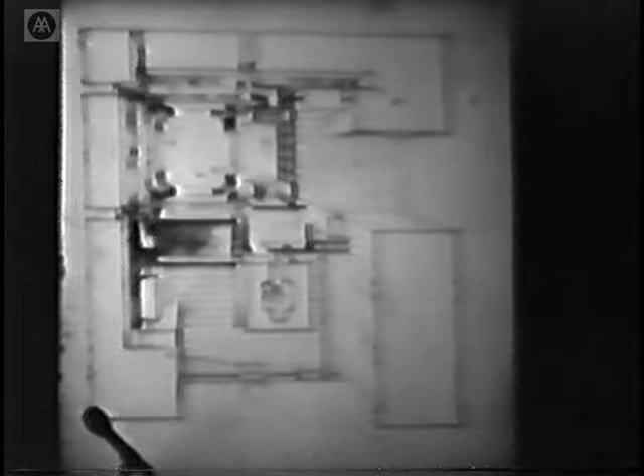The drawing on the left, which looks as though it's come out of the archive, covered in patina as it is, is the first job we did, which is Forest Gate High School. And that on the right is a recent building, Melrose Avenue Activity Centre. The one on the left is a masonry building, the one on the right is a steel frame building with cladding, which we will talk about more later.

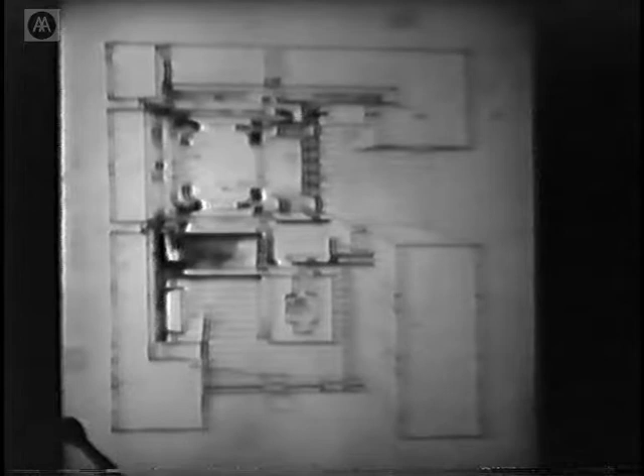But in both, there is a similar preoccupation, albeit the one on the left is to do with the coincidence between structure and the spaces, and the one on the right, being a frame building, allows a certain amount of loose fit in terms of the functions, but both address themselves to this business of hierarchy and priority.

In Forest Gate, for example, the context of the building is established by the classrooms, which is this L-shaped container, and which encompass and grip the communal parts of the building, which is the hall and the library, stage, and small hall. That is hall, stage, small hall, and library over it. And then these, in turn, inflect the spaces which are contained by the whole figure.

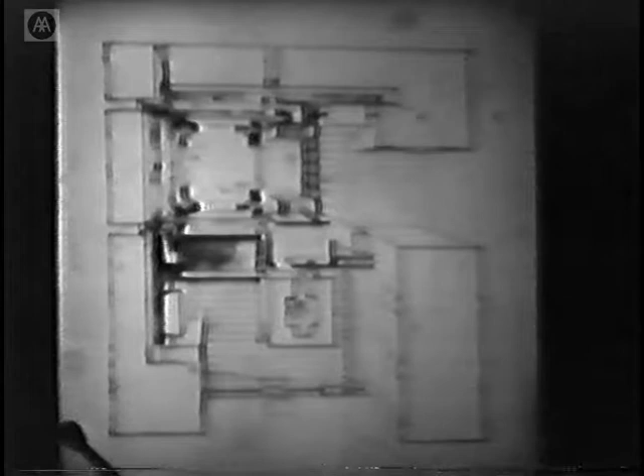In the case of this much smaller building on the right, this activity centre, the lower space is the communal hall for this activity centre, which is a euphemism, I think, for a village hall, really. But one of these dreadful modern expressions which one has to deal with these days. And the peripheral L, as it were, are the special kind of private functions which support the space. And without their existence, in both cases, there would be no container for the hall. It exists as a dependent upon its container.

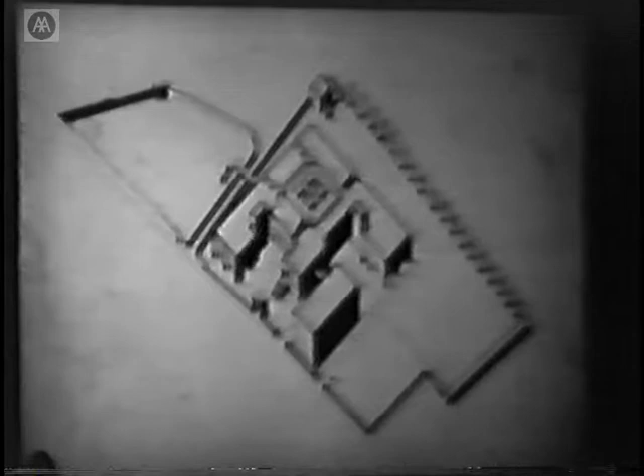And similarly, if one goes on to later jobs - this again is Forest Gate, and the one on the right is Holloway College, chemistry building. The building on the right, the chemistry building, makes the principal laboratory spaces on the ground floor by the matrix of the stuff over it.

These big roof lights actually are related to large teaching spaces underneath. And if you were to lift off the top floor, there would be precious little to contain the volume of these large labs. So that one idea is contingent upon the other.

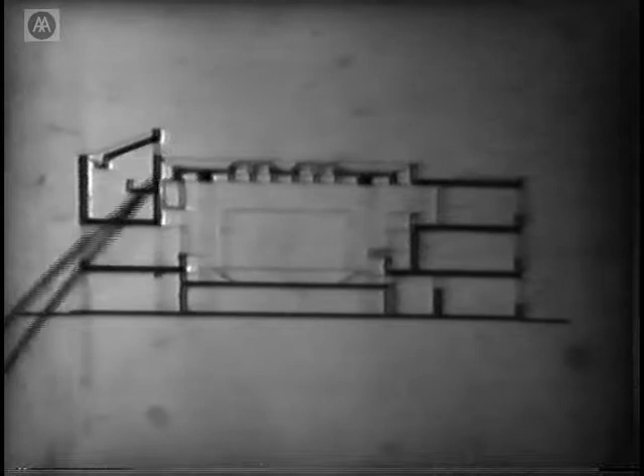This on the left is our first job again, Forest Gate High School, and that on the right is a later school, Clifton Cannon Lee in Yorkshire. The one on the left, again, exhibits this thing I was proposing just now. That is to say, here's the library, the small hall, the hall, and the classrooms. You can see that if you strip it off, there's no container for it, so that the one is dependent upon the other.

And much can be said of the other building on the right. In both these two cases, and also in the case of the activity centre, this coincides with what can be considered private functions, that is to say the classroom areas and ancillaries, and public functions, those which are communal and are in some way symbolic of the essence of the school or schools.

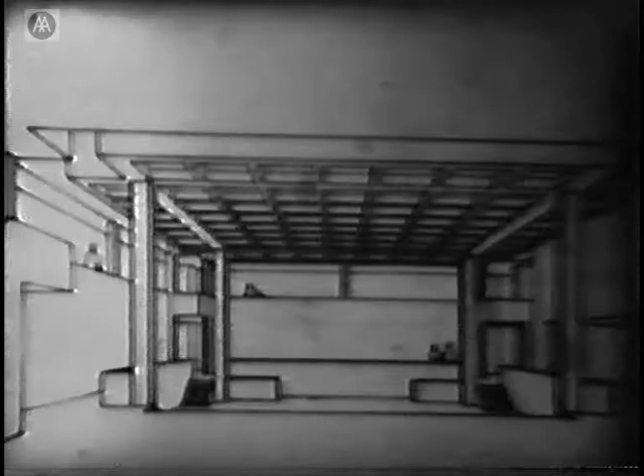This is illustrations of, on the left, Forest Gate, and on the right, the chemistry labs. And with the slide on the right, you can see that the grey area above, that is to say these strips of material here, actually form the container for these semi-public, big generalized laboratories, which are the teaching laboratories below.

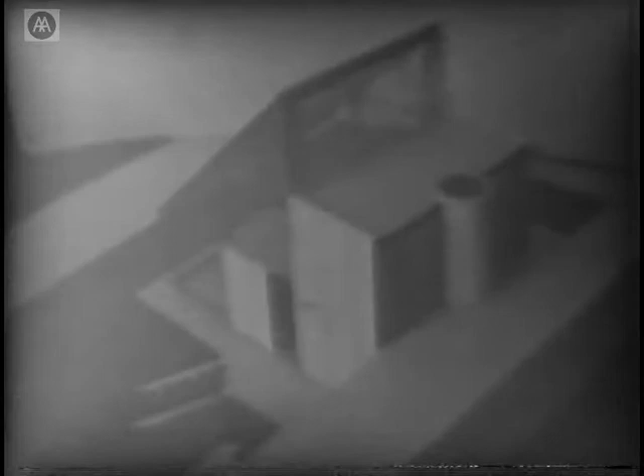Now that, I think, concludes the introduction. But just to say one thing, even it's nice. Oh, that's it. Yes. I was going to say one more thing.

Even when you're dealing with a small problem like a house, similar preoccupations can be enjoyed, and in the little house on the right, the same preoccupation exists. That is to say that here, in this area in front, as it were, in the glazed area, exists the living rooms and so on, the more public part of the house, and the rear part, both the top level and the lower level, one gets the private functions, bedrooms and so on, and the two elements thereby are locked together. This is a different idea than a string of beads.

In the case of the labs, which Alan will now expand upon, this principle of volumetric planning, as it were, has an advantage insofar as it permits a large-scale module of pieces. That is to say, you get a series of T's here, and associated smaller laboratories to the sides, which are a trigger, as it were, for any possible extension, which at the time we designed and built this building, we assumed might happen.

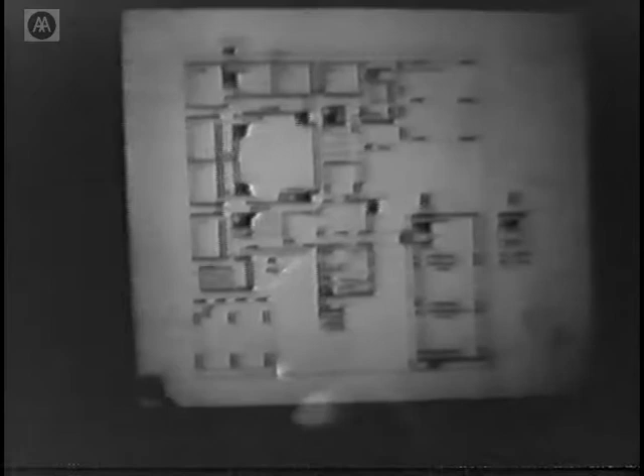Well, this is going back again to Forest Gate High School, which was our first job. It's in what used to be West Ham and is now Newham, a straightforward secondary modern school for girls and boys.

I think there's a site plan which perhaps I ought to show.

The site plan was really indicated on the axonometrics that John showed just now. It's a very small site, and one of its characteristics was that it was intersected by a public footpath which had to be left intact. So the site consisted of two sites, one large and one small, and the small one was a strange triangular shape, on the left of the plan you see. Because of the restricted site, we decided to build as high as possible, compatible with convenient use of the school.

And this we thought would result in a three-story building.

Owing to this public footpath that bisects the site, one of the essential ingredients of the brief was that we should be able to move easily from one side of the site to the other. Furthermore, in the future there would be a further extension, which we were going to locate on the smaller side of the site, which was another reason why we would have to bridge over this public footpath.

This was, I suppose, the primary practical reason why we decided to have the main circulation of the school on the first floor. There were also formal reasons for doing this, because in so doing, one was able to create a principal floor which was equidistant from the other two floors, and so somewhat reduce the feeling of the three-story building.

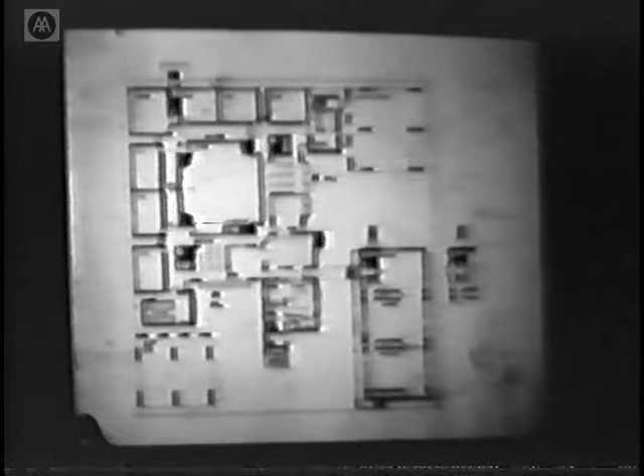This is the ground floor. The plan on the left is the ground floor, and as John explained before, the classrooms wrap around on the outside, and the central space is the assembly room with its adjacent small hall and stage.

Well, basically those are on the first floor, and the ground floor consists of a large store which is about 6'5", 6'6" high, in the centre under the assembly hall. Under the stage and the small hall, which are slightly raised from the assembly hall, we have the main entrances with their locker rooms and coat hangers, that kind of thing.

This is where the students actually enter the building, in these positions underneath the stage and the small hall.

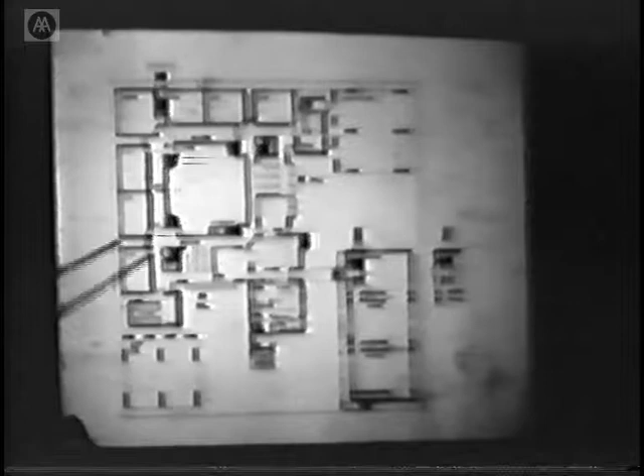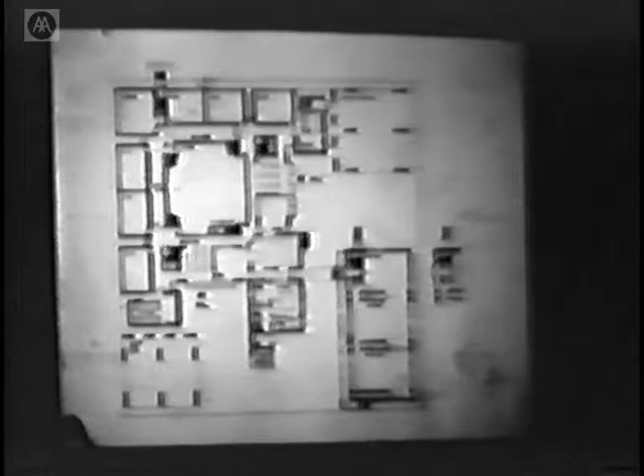There is a truncated L of classrooms on the ground floor, and the extreme ends consist of covered play spaces, which are under special classrooms on the first and second floor, the art rooms and science rooms, classrooms which are bigger than the other ones and which require special servicing, and therefore should be grouped together.

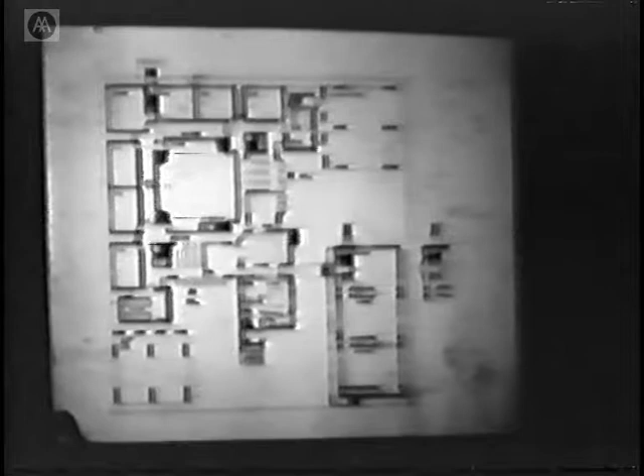There's a kind of binuclear organization in this school, which a lot of things seem to fit into. There is a division. The entrances are divided between the girls and boys, which is completely a non-ideological decision on our part. It was simply useful as a further extension of this binuclear idea, and it was in fact a requirement that the headmaster at that time wanted. But of course there's no reason why it should be maintained in the least.

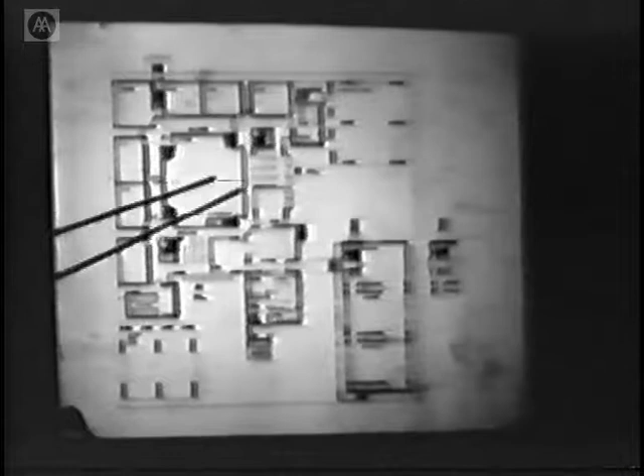In addition, on this floor, besides the entrances, you get a dining room here, which is associated with the kitchen there. And then also there are lavatories, which are entered straight off the hard play areas at the ends there and there. And the two main staircases go from the ground floor to the first floor in those corners.

Now this is the principal floor, the first floor, and I'm sorry, I'll probably be obscuring it from people on the right.

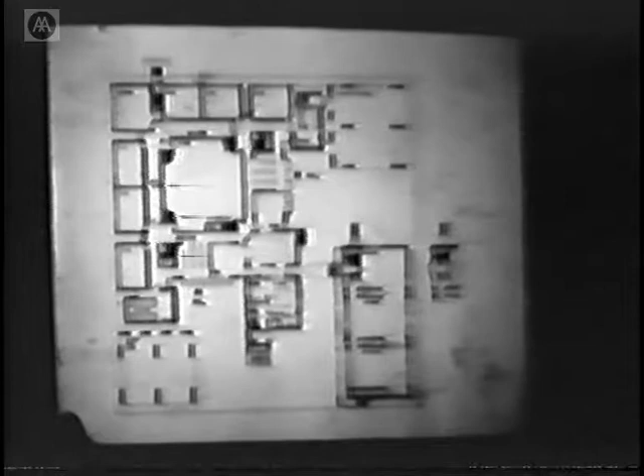These are the special classrooms at the ends, which are over the covered play spaces. This is the assembly hall.

The point about this first floor circulation is that because it's the first floor, it becomes the most frequently used level of circulation. In order to circulate from one end of the building to the other, if you're going from one classroom to another, you actually have to pass through the hall. You pass through it not through the center, but along a raised gallery at first floor level, about 3 or 4 feet higher than the assembly hall itself, and you can circulate right round the assembly hall.

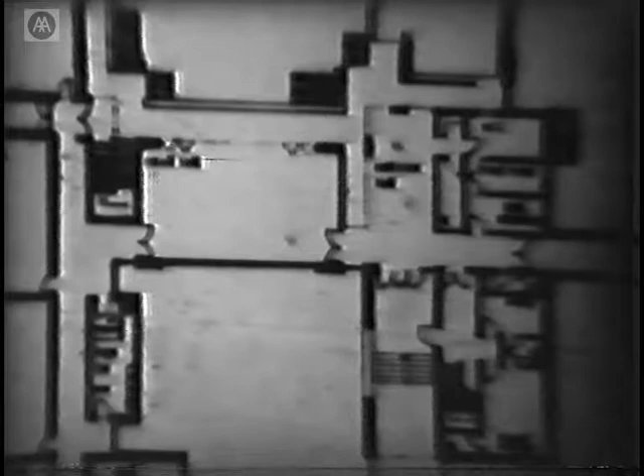This has an added advantage which was made use of by the English master there, who looked after dramatic performances in the school, in that it could be used as a theatre in the round. It could be used either as a conventional theatre with the stage here and the audience in the assembly hall and more audience sitting round, or the whole thing could be reversed, with the audience on the stage and the hall used for acting. The lights were organized so they could be moved easily and adjusted to the required positions. This actually worked quite well—we saw a performance of theatre in the round, which was quite successful.

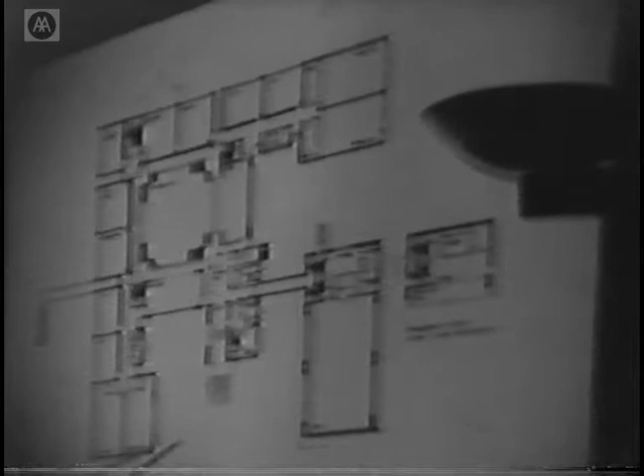This corner, over the dining room and the kitchen, is the main entrance to the school, to which you approach from the outside. There's a flight of steps leading up to the first floor. The entrance to the side, not shown on this drawing, is the actual side boundary along there, and there's a gate and a sort of porch which you go through. You arrive almost in the center of the school, and you immediately see the space of the hall.

Here's the bridge which leads to the other side of the site. The footpath runs underneath and was intended to lead to the extension, which would have been a separate pavilion on two stories. There's a further bridge which leads to the gymnasium, two gymnasiums at this corner of the building. In fact, the accommodation in this block consists of workshops on the ground floor, and two gymnasia, one over the other, one for girls and one for boys.

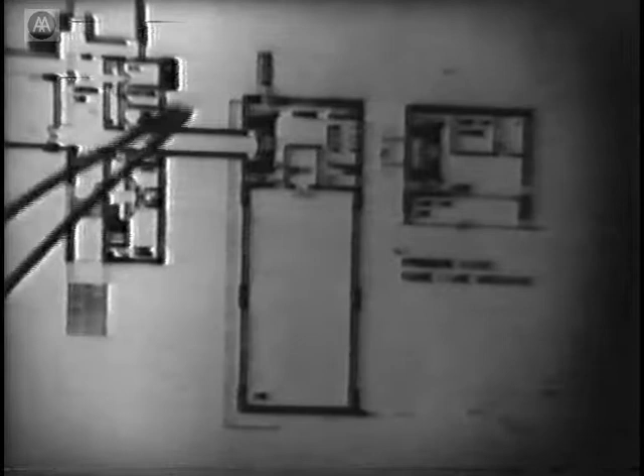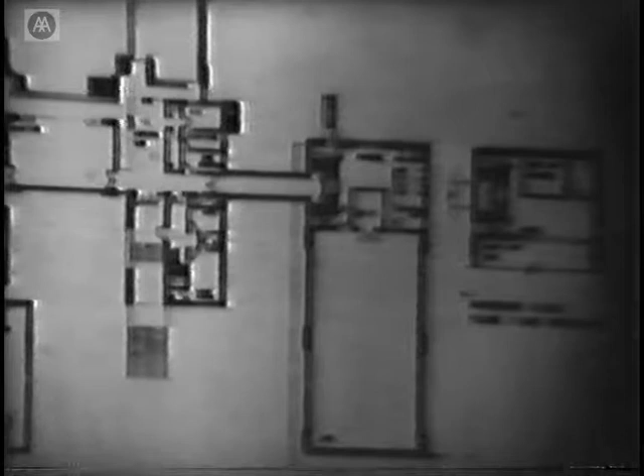This enabled one to get the noisy areas isolated from the school, but also enabled us to complete this notional volume which the building, in theory, consisted of, providing the feeling that in these areas you were actually inside the building with no roof. So the environment of the building really starts along these lines, and this is emphasized by the treatment of the surface of these courtyards, which were in red tiles, similar in colour to the red brick of the building.

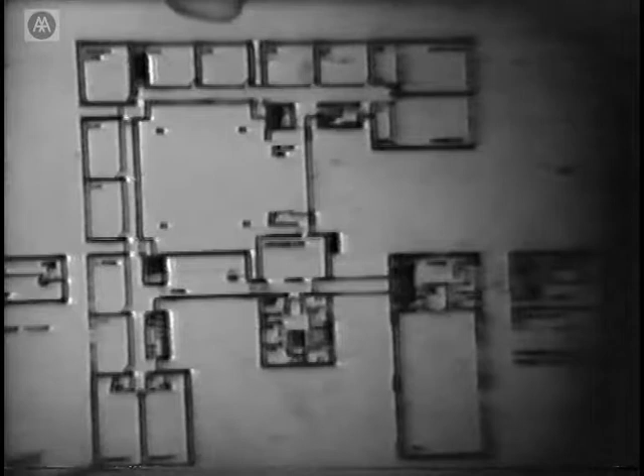This is the building, in fact, as it was built, and it was capable of extension either sideways or at the bottom or at the top. This drawing shows an extension at the top, and I think there's another drawing which shows the potential extension at the side.

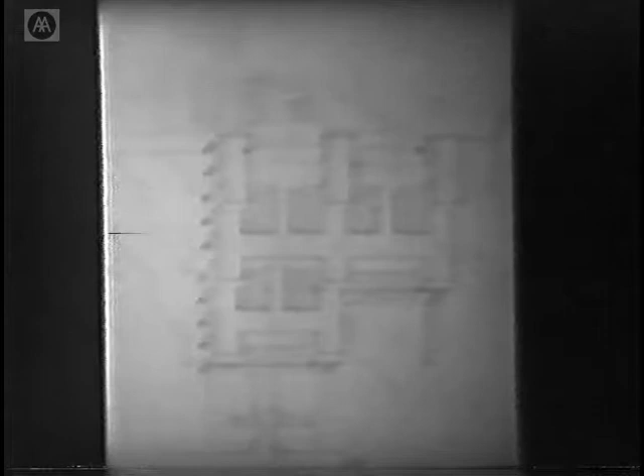Just to reiterate what John said about the basic formal concepts, these light wells let light into the major undergraduate laboratories, which extend. Could we go back to the one just before? This is the building as it is, in fact, and I'm sure it'll never be any different, because things don't happen the way you expect them to.

The undergraduate laboratories occur at the ground level underneath these light wells, and they're organized from side to side. You can see out at the ends, but the ends don't in fact provide much light — the light is provided by these light wells. But on top of the undergraduate laboratories, there is a kind of network of other provisions of a slimmer, skinnier kind.

The first type is this T of postgraduate laboratories. There were, I think, six of these — we had provided six. 1, 2, 3, 4, 5, 6. And at the ends of the arms of these T's were double-banked strips of professors' laboratories and offices and various ancillary rooms.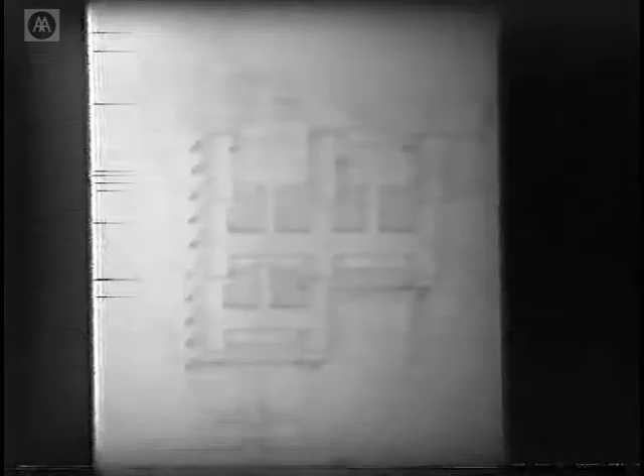Would you like to go on? Yes. If you move, I think we should keep them on. Go on. Okay, so, describing the plan.

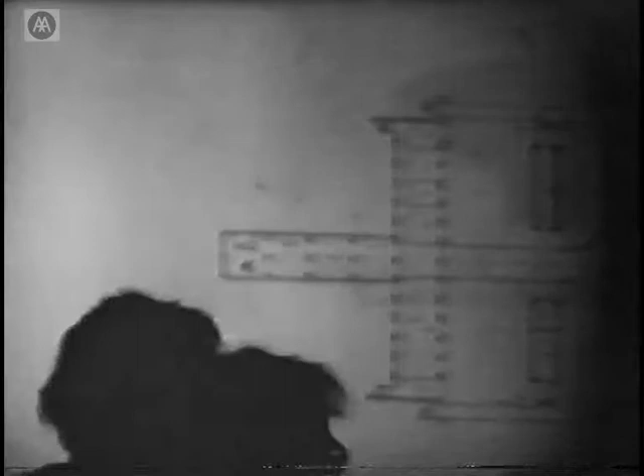The lowest level of plan is the service entrance here, the store here. Two sort of dangerous laboratories liable to explosion had to be outside the building there, and the workshops along there. Then going up one floor, this is the lower of the two pairs of undergraduate laboratories with their ancillary rooms along the right-hand side, and a vertical circulation core which goes up through four stories and links the main service storage with the various laboratories.

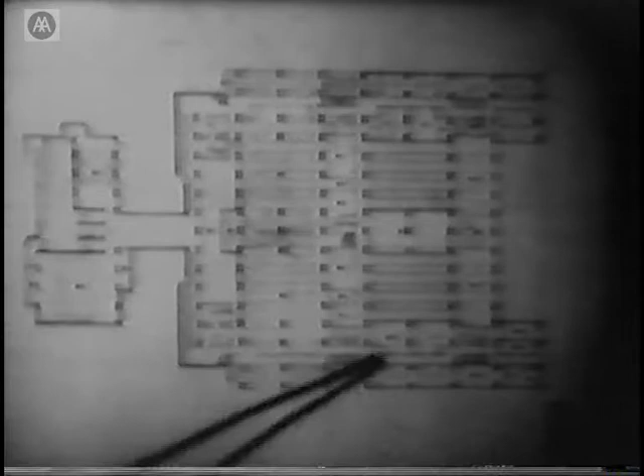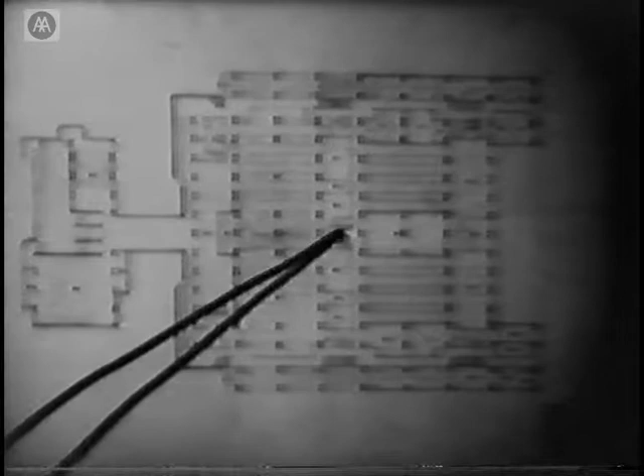Well, anyhow, this is the next floor. You see, really, the building is divided into two parts — that part and that part — and this part is an exact repeat of the part below. So here again you get the two undergraduate laboratories with their ancillary buildings, and in this case the link to the central core of services is at that point. These are the postgraduate laboratories, research laboratories, and these are the ancillary rooms attached to them.

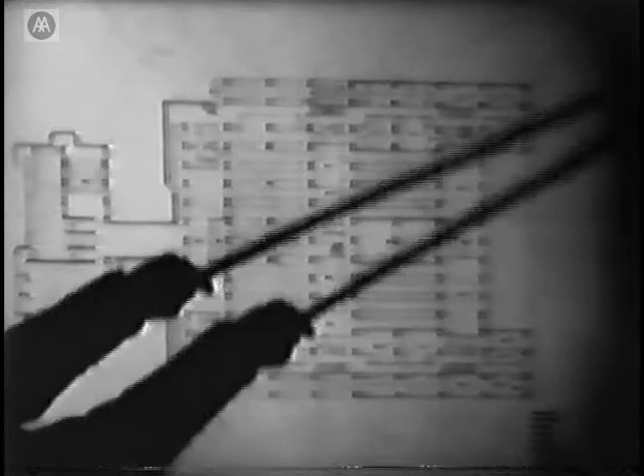Now, going up one further floor, you arrive at ground level, at the entrance end of the building, and this is connected to a pedestrian mall. Basically, the site is organized on a Radburn principle, with pedestrian circulation down the middle and a peripheral road for private cars and service vehicles. This mall, in fact, bisects the whole site and bifurcates at a certain point, linking all the principal buildings on the site. So it constitutes the main entrance to this building.

This, in fact, is the main entrance hall. You go up and down half a floor by means of a ramp to either of the two available floors at that level - if you go half up, you get to a research level, and if you go half down, you get to an undergraduate level. At this level here, you can see there's a connection underneath.

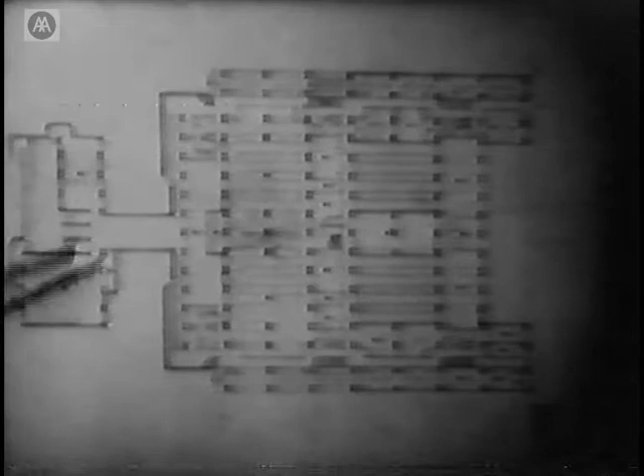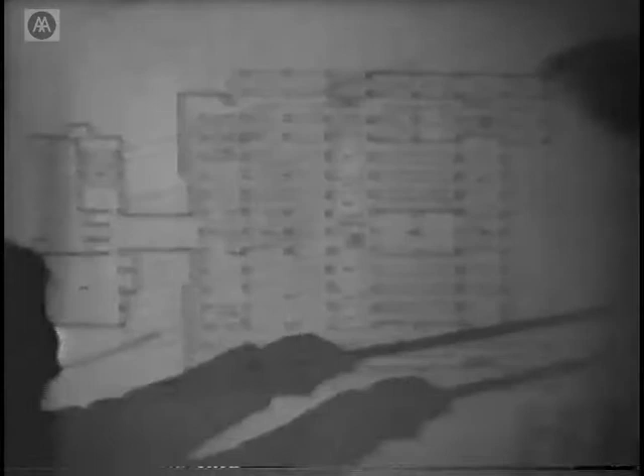I think one more floor, is it? This side.

Well, the top floor is missing, but it consists of rather special accommodation, principally a library, which is detached from the main structural system of the rest of the school, and forms a kind of porte cochere under which you enter. It also dominates the entrance side, as you see from here - that's the mall running along there. The library doesn't announce its function in a clear way. All it's saying is that it's an important part of the building which is not organically connected to the rest, which is somewhat separate.

Then these two wings were the two wings that ultimately were to have extended up the hill. This is the side view - we're showing this model because it's very diagrammatic and illustrates the themes rather better than the building itself. This shows how the building slopes down the site. The circulation of the building runs down the two sides and follows the slope in the site on two levels, like that.

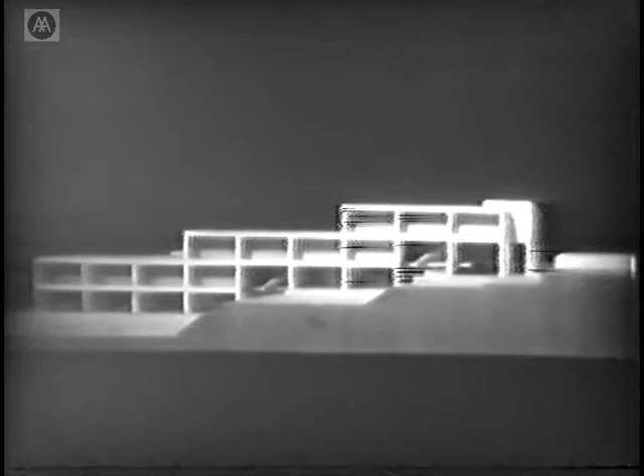You can see that you can change your departments, as it were, by simply walking on the same level. Another advantage of the slope was that it enabled one to get a feeling of the outside more frequently. All of these rooms face over the countryside there, so there's a considerable amount of penetration of outside space into the building.

Connected with that, another thing we did was create a covered gallery on both sides of the building, partly because some students come from Egham, down the hill, and would enter the building from the bottom and not the top. Also, there are direct entrances and escape exits up the side of the building on both sides, and all these routes are connected to this covered walkway which goes up the building. This also enables the building to relate more satisfactorily with the ground outside, because you get a kind of intermediate zone between the outside space and the inside space, which is the covered zone of the gallery.

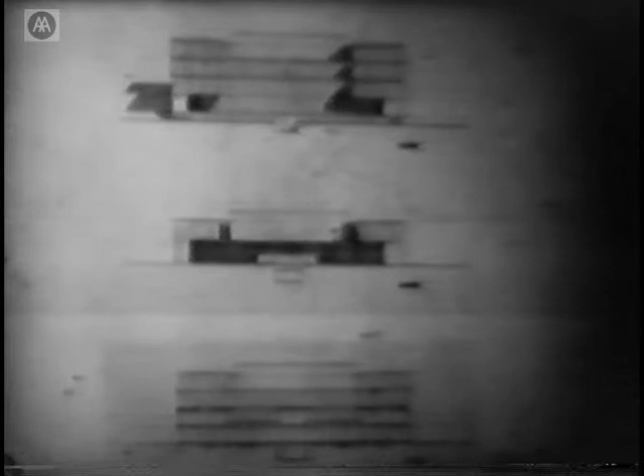Now, about the specific requirements of this particular building, as opposed to general solution types. The first was that it's a very heavily serviced building, so one had to make a decision about how the servicing distribution related to the structure. There were two basic choices: one either made a service level, in which case the services would be more or less detached from the structure, but this turned out to be very wasteful in terms of volume.

So we decided to canalize the services, and this involved splitting the structure both vertically and horizontally. All the services - the piped services, that's compressed air, water, oxygen and so on - were distributed through the split structure, as well as the warm air heating. So the characteristic form of the building is determined partly by this requirement for integration of services and structure.

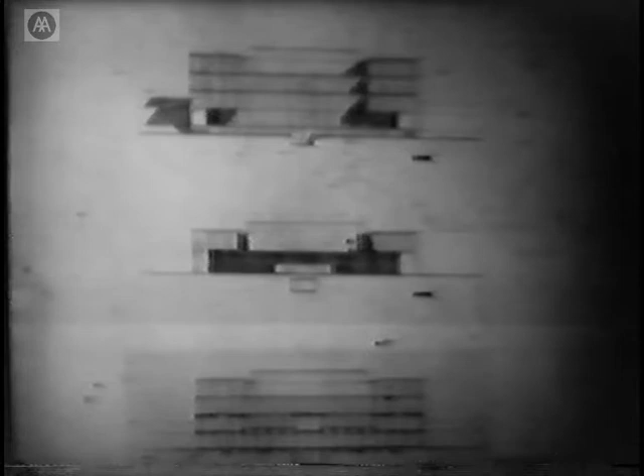The module of the building is 3 meters from center to center of paired structure - that is to say, you get 1 meter, the little bay is 1 meter, then 2 meters, then 1 meter again. That gives an optimal distance between benches.

This leads to the second specific requirement of the building, which was that it should be in some way flexible. This wasn't made very clear, but it was obvious they required both the possibility of extension - which John and I have dealt with - and also the possibility of change on a micro level. To satisfy this, we chose a close distribution of services which would enable any fitting of any kind to be plugged onto any column, any pair of columns in the building.

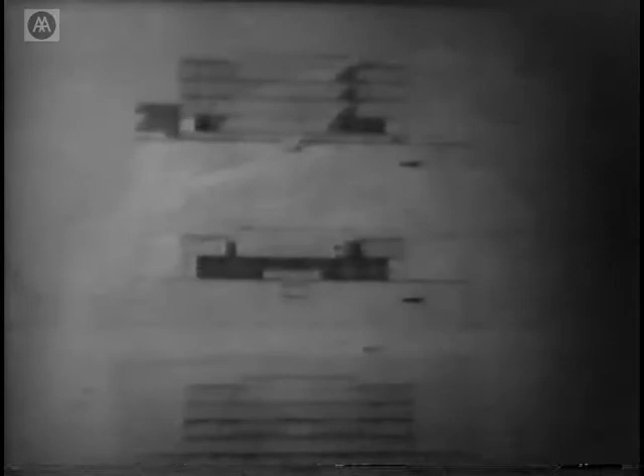So the flexibility or adaptability didn't lie in a technical solution like dry partitions that could be easily demounted, but in the actual configuration of the service distribution, because we reckoned the problem of moving block walls isn't very great. What's absolutely critical is that whatever degree of adaptation you make, you should always have the services at the point where you expect and need them.

This illustrates the split structure. The ducts and pipes go horizontally between the split beams and vertically between the split columns. We also have fume hoods which discharge through the split columns.

The section really illustrates the organizational principle of the building, the repeating large-scale element. In principle, all you have to do is add another unit of that sort, and the concept of the building remains intact in spite of alterations. That's on the large scale, alterations of a large scale.

Alterations of the small scale wouldn't affect the feeling of the building and the overall structure at all, because what gives the grain of the building is actually this universal double split structure, and the exact position of partitions within defined areas is not important.

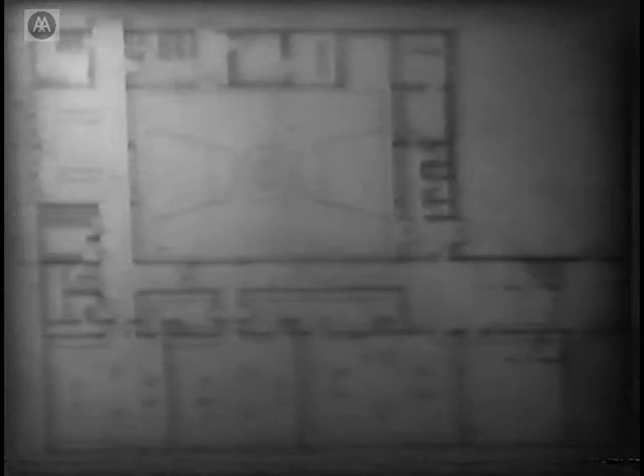So from here to there, the roof extends from there to there. That's just circular, that's where it links onto the existing building. This is an entrance direct into this from the playground.

And these are classrooms, these are light. This is the lower floor. So these are preparation rooms, because these are science classrooms.

That's the upper floor, showing two light wells there, which have roof lights over them, so that you do get light into the ground floor at those points. There's a main staircase there and a secondary staircase at that end.

And this is simply a viewing area where they can watch the people in the gymnasium. This was in fact, yes, this is a longitudinal section showing the two staircases.

That's an elevation classroom. This was a steel structure, and one of the requirements was that we should build as quickly as possible.

And in fact, the steel structure went up in less than a fortnight, but everything else was so slow that it didn't make any difference at all. It just was been built in brick.

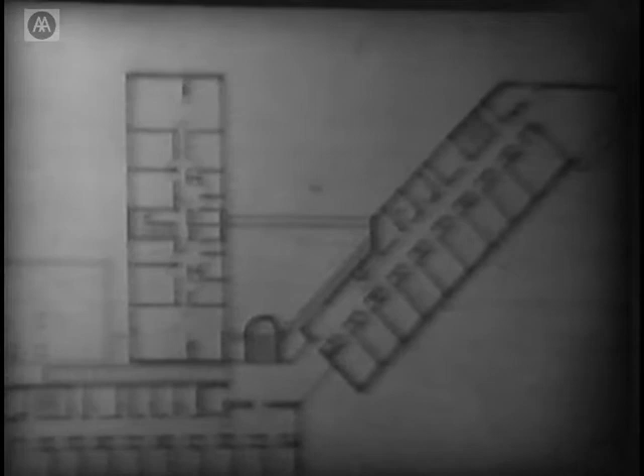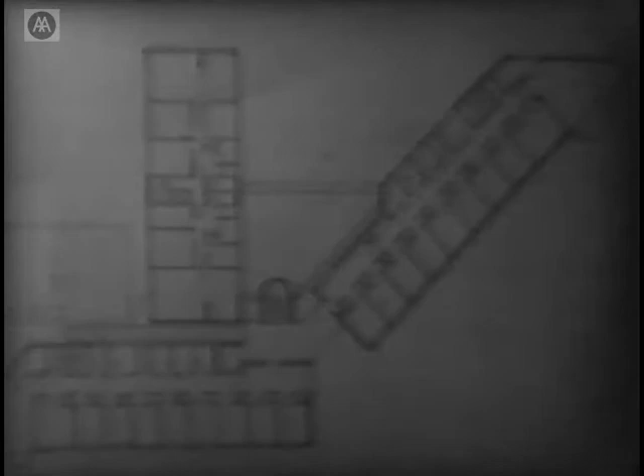The principal organization of the home was laid down by Haringey Borough Council and ultimately by the Ministry - that it should be broken up into four sort of houses, or flatlets as they call them. So you have two on one side and two on the other, comprising four more or less self-contained houses with these very, very small bed-sitting rooms, which the old people get turfed out from at 6:30 in the morning, not allowed back there till 9 at night.

They're really terrible places. And we're trying to make the best of a very bad job in terms of the human conditions that exist in these old people's homes, and the constraints of cost.

One new thing we were asked to introduce was that each of these houses has its own little centre where they take their meals. This produces problems of food distribution, but they think they're going to try and make it work.

So it might do something to ameliorate the effect you normally get in these old people's homes, where during the daytime there's one room in the building where everybody is sitting watching television, which is the main hall. That's all they all go - they either sleep or watch television.

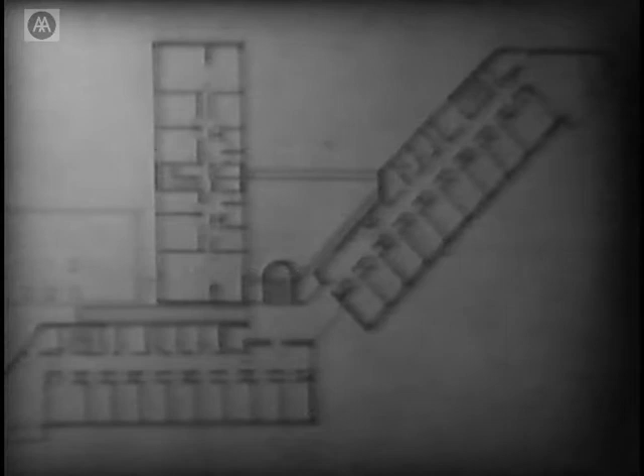So at least they have a choice of places where they can go, and hopefully they can even go to a neighbouring house and visit somebody else in their own common room. Whether this is going to work in practice, I don't know, because of the disciplines which the staff have to impose.

Are there any queries on what I've said? Yes - I noticed this paving pattern in the chemistry room, very related to the building itself. Did you design the paving?

Yes, there were special pavings. They were on the module of the building - in those days 1'8" by 3'4", half metre by 1 metre. We actually found somebody to make them quite cheaply.

I'm not sure which one is which, actually. That's right.

The last three jobs we'll show you tonight are a house which wasn't built, a holiday house which was built, and this activity centre which was also built in Milton Keynes.

As per this axonometric, here you have the wall and the roof light and this element which is posited against it, thereby playing a formal game with that wall. The terrace from the living space clips round into that sheltered area. The reason for this was not just only a reaction to the site in terms of its formal nature, but also there's a drive here which goes up to the second house, and this splay enabled one to get some kind of privacy for the owner and his family.

Now, have I had that one before? Yeah, I have. Oh dear.

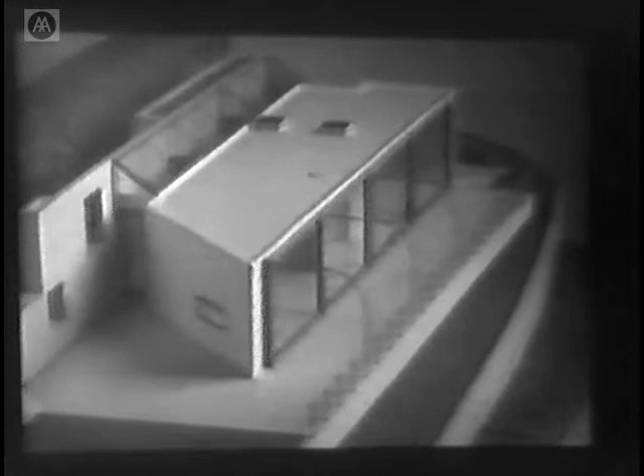These are just photographs of the model of that house. We were interested in also creating, making the external space into a room. That actually, I think, also relates back to Forest Gate right at the beginning. The enclosure of the classrooms and the halls make external spaces which are rooms.

In this case, these openings, which you see through as you come down the upper walk, are, as it were, windows to this outside space.

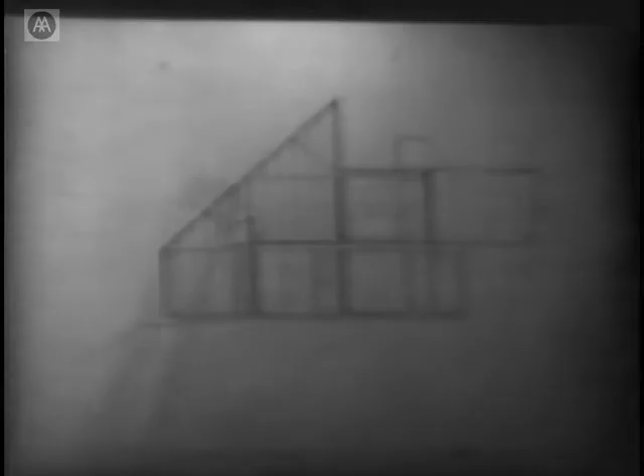That is, this is the communal, or the relatively communal areas, and the ones tucked in behind are the more or less private functions. They're connected, in this case, with a staircase, a spiral staircase up here, and one at the back, which you see indicated by this overhead light and the drum here, which is here.

On the upper level, one gets the living space and kitchen and a dining area. On the lower level, the bedrooms and the children's play space, and the play space connects to the living area.

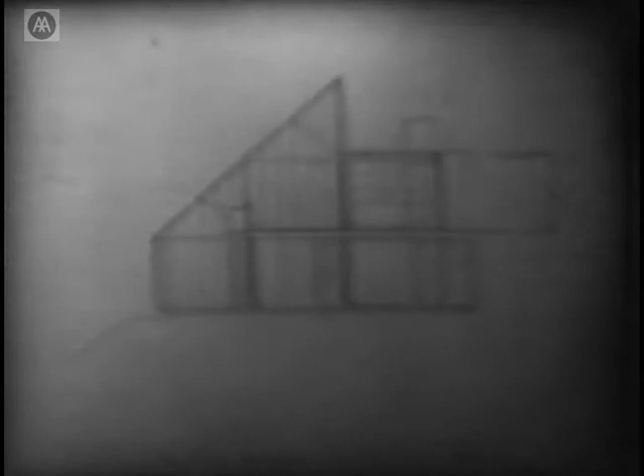The reason for this was to enable the best advantage of the views of the estuary. This inversion exhibits one of the continuous problems, I think, that we face very often as architects: when you want to make something which is slightly more idealized than perhaps practical necessity would require, and given that there's two conditions, I would veer towards the ideal rather than the practical. This may not please the people that use it so much, but I think in fact it actually gives a plus to the project.

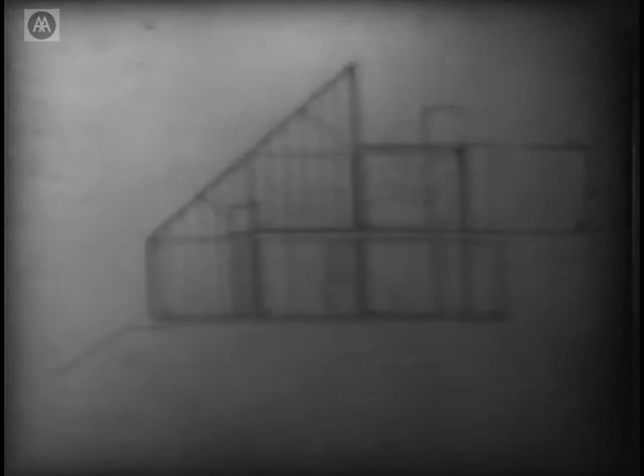Of course, by putting the bedrooms on the lower level and the living room above. Incidentally, that isn't quite as critical as one perhaps should have stated, because the ground floor is connected to this terrace. This house hasn't got a front door.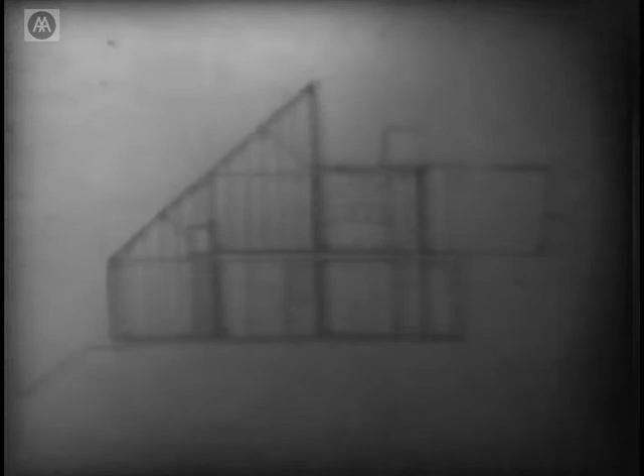The front door, as it were, the entrance to the whole compound, is detached at the road, at the back of the site, and it is in a sense like a pavilion in a park, which doesn't make a special demand for a particular entrance, but there are many ways of getting into it. In fact, you enter directly into the bedroom spaces on the lower level, as you do in the front here and at the top.

Like Holloway, as Alan says.

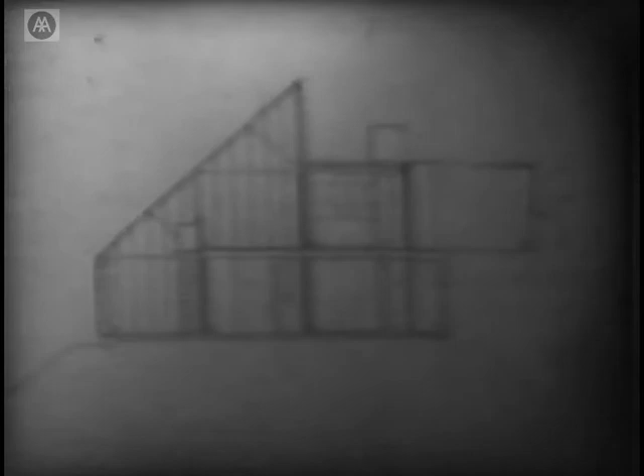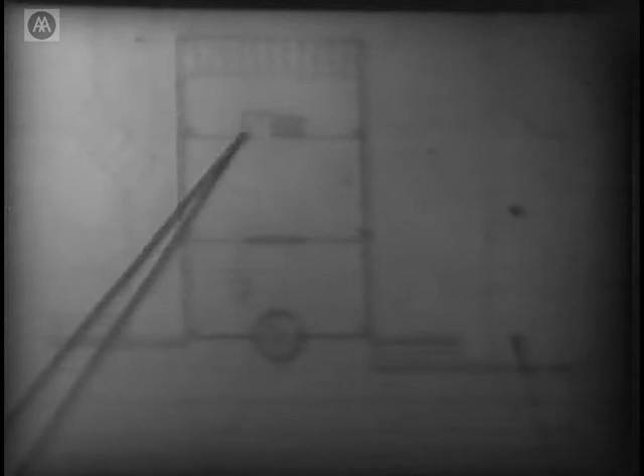Now, I'm going to mess this up again, I think. This is a slightly earlier plan. In the very first design, we were toying with a straight flight at the front here, because we were a little bit worried about the duplication of the spiral staircase. But I think I'm glad to say that we decided finally to opt for that particular option. We have now a spiral in the front and in the back.

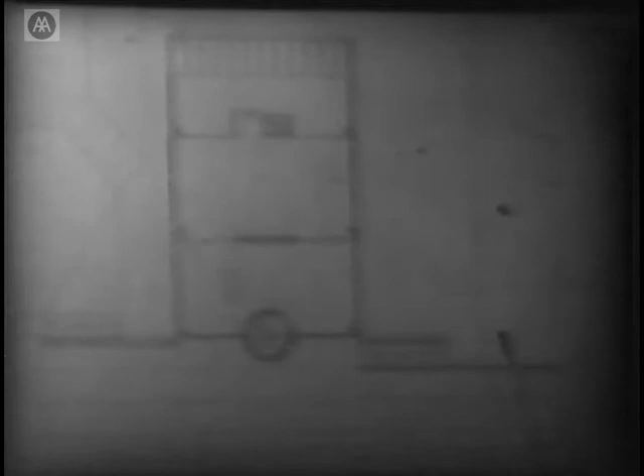And basically the plan is a play of squares, both in plan and section. On the ground floor here, you get three spaces which are bed spaces. They're not really bedrooms, since the division between them is sliding and can be pushed away, which allows a degree of flexibility of use in the daytime.

The fourth of the squares at the back here is the bathroom and storage core, which is approached from the bedroom spaces, and these enter directly from the outside area. These are the children's spaces, these are the adults'. And this front area is intended for kind of kids' play space when the weather doesn't allow them to go outside.

In the back there's a storage wall which bisects the cylinder, which penetrates right the way through the whole house and enters directly into the parents' bedroom, next to them up to the living space above. So this is a sort of optional circulation, which means one doesn't have to have the disadvantage of a lot of corridor. One uses this space as circulation, as an optional circulation, rather than you find in French enfilade planning.

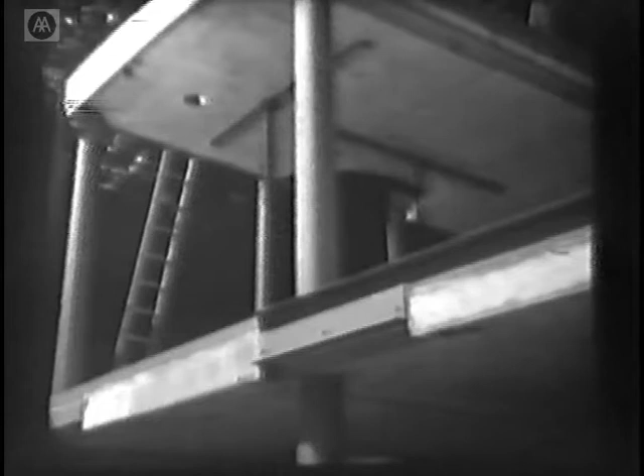I suppose one could say it isn't the most economic way of constructing the house. There might have been other ways of doing it which might have been cheaper, but in terms of getting the maximum out of the space and making something which was as transparent and as effective as one could, we opted for a frame construction of this sort, with the columns detached from the slabs, such that you get a column which runs up a height and a half, like this, on the top level, and similarly on the lower level, you get the same thing, it's the same element, which gives a sort of giant order to this space.

The alternative would have been, of course, to put the column back into the slab, and then have lost a little bit of play of the volume, which is reinforced by this structure.

Again, there's the finished house, and there's the elements of the construction with the drum, which was hoisted into position by an enormous crane from the back here somewhere, and dropped through this semicircular sleeve, and into which then were inserted these doors, which go into these openings, and then the cladding is bolted to the steel angles, and the doors bolted to the similar angles which are turned down to receive them.

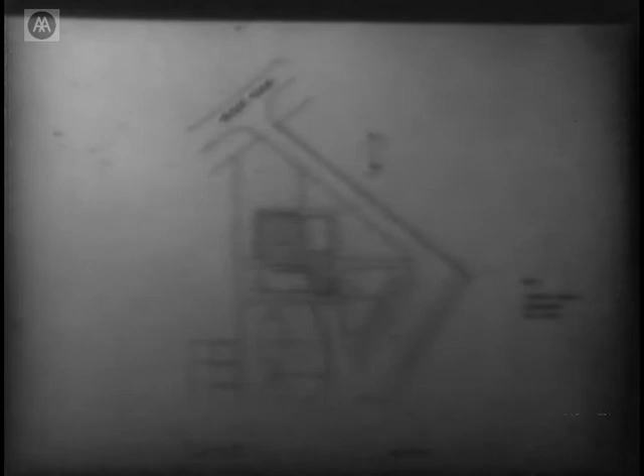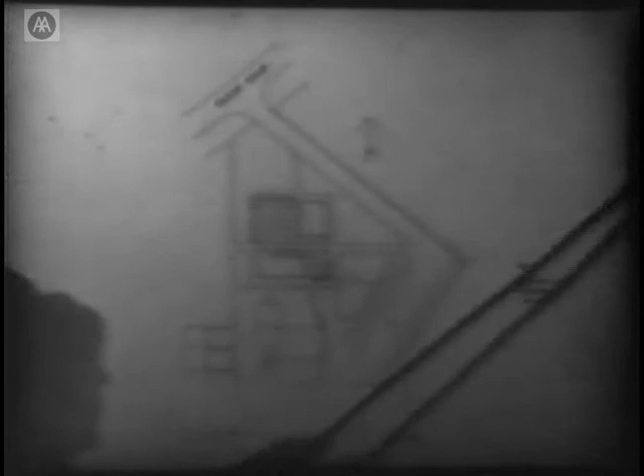This is a job we did in Milton Keynes. It was completed about the same time as the house, and it's built in a post-war housing estate, which you can see bits of indicated on this site plan. It's a steel frame building which has got I think nine columns, and the roof thereby encloses the whole volume, the roof coming up to this line here, which is the sort of envelope of the space.

This is a communal area, a hall, collective use. This is a playgroup area. This is an entrance. This is a workshop. And these are various ancillaries, kitchens, lockers, and so on. Again, the building can be entered in a number of places. As we said earlier, these elements actually create the communal area by their position in relationship to the structure. It's a very simple plan. But I sometimes think that one gets over-complex with one's plans, and maybe there's an argument for a certain amount of simple proposition about the general arrangement of parts, in order that you can develop the detail in a more complex way.

On the right is the axonometric of the structure, which is a tubular steel system, which we designed in conjunction with Samuely. It's about 1.5 inch square tube system, metre square grid, and was assembled on site after being made in the factory, pre-painted, and lifted into position by these 4 cranes. And in it you can see the ghost, as it were, of the private accommodation, the supporting accommodation, which is indicated by secondary steel members which engage the glazing, both around the perimeters and also around the clerestories around these blocks.

That's a shot of it just being let drop down. It was amazingly accurate considering the difficulty one would expect, but I think there was only something like half an inch deflection on that right-hand corner. Even so, that was sufficient to merit jacking that end up.

On the right, you see the node of the structure, the column, and the cap of the column, which has bolt connections to its neighbours. Each of the 2 metre square elements, of which this is one, was made separately and bolted together on the diagonal.

And the structure runs actually diagonal to the plan. One of the big pleasures of the building is the play of the diagonal with the orthogonal system, and the way the two interpenetrate and give a certain richness to the detail.

This Michelangelo character on the right here, lowering the top over the column, and here's a rainwater pipe which was pre-made inside the structure and connects finally onto the roof.

The photograph on the left is a shot of the play space, and one of the entrances. We used on this job entirely, as much as possible, industrial products. One couldn't be as rigorous as one liked because of cost, but we managed to use these perforated screens for the enclosure, which we thought would be more amusing for the children rather than the kind of thing one finds so often, chicken wire and stuff.

I think originally they started life as, the firm that makes them, for sifting grain. The material is used for that.

What? What? Is the sweater on? The sweater? That's, I suppose you'd say that was on the diagonal, if you take his torso as being orthogonal.

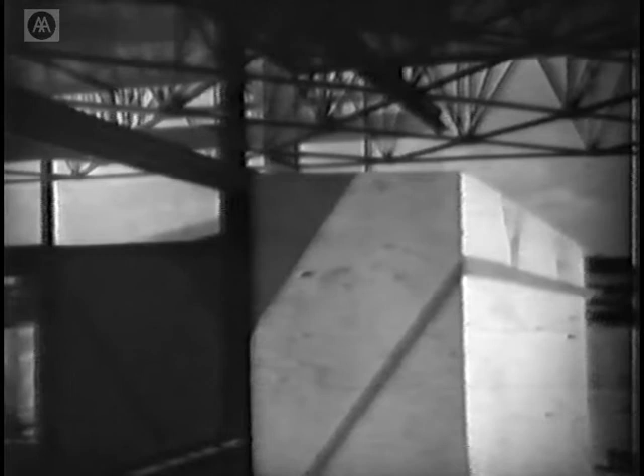The lighting also runs the same way, also on the diagonal. We have a lot of battles with our service engineers, bless their hearts, to try and get them to make their lighting go in the way that one would like. It's always a difficulty. They would prefer to have a random system, or a system to suit the individual space. And we wanted to get the lighting on a sort of universal basis that ran consistently through the whole structural system.

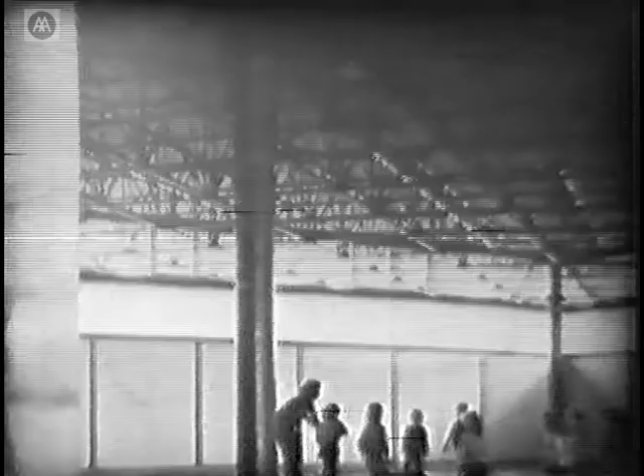Now here you see the penetration of the lighting I referred to, and the kind of complexity of detail in relation to the simplicity of the plan, which means it's a building that's more engaging the closer you get to it. Whereas so often one finds it's the other way around.

With modern buildings, very often it's at a distance that they're engaging. When you approach them, there's a certain amount of disappointment. The photograph on the right is also interesting, apropos of what we were saying earlier about the way a contractor can be engaged to participate in the design, if tackled the right way.

We wanted to make a sign for the building which was compatible with its attitude to the steel and elements and so on. And we evolved this strip of steel which was bent and welded together, and engaged the contractor in a very useful way. He was very productive over this, because it meant he was actually engaged as a craftsman, or his men were, and it was something they enjoyed doing.